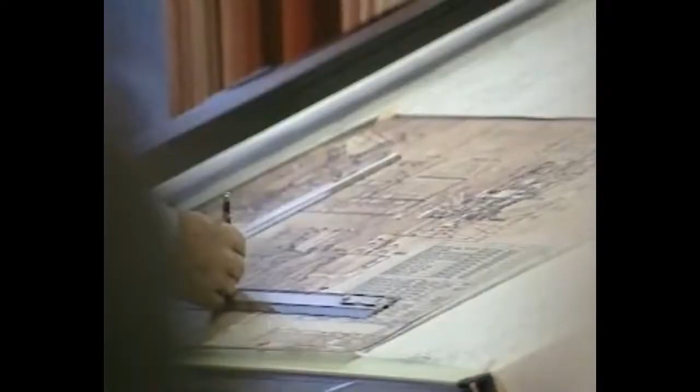BMV, Bergens Mekaniske Verksteder AS, is a holding company for the following group of companies: BMV Engineering AS, BMV Laksevåg AS, BMV Bergen Contracting AS, Bergen Jernstøperi AS, Norwinch AS, and BMV Machine AS.

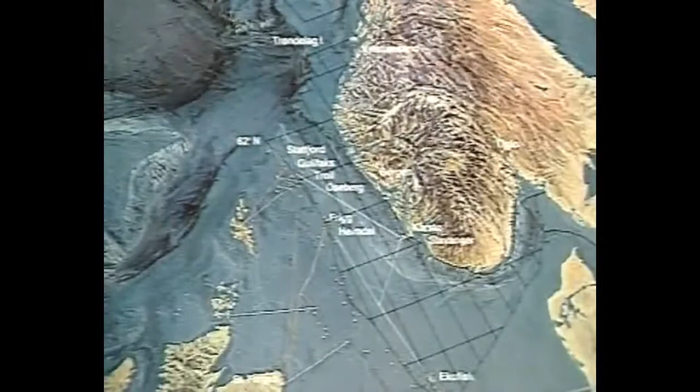BMV Machine AS is located near Norway's second largest city, Bergen. The plant itself is located at Hordvikneset, some 20 kilometers to the north of the city of Bergen.

The modern installation was established in the period between 1968 and 1972. The site itself covers approximately 50 acres, with approximately 10 acres presently being utilized.

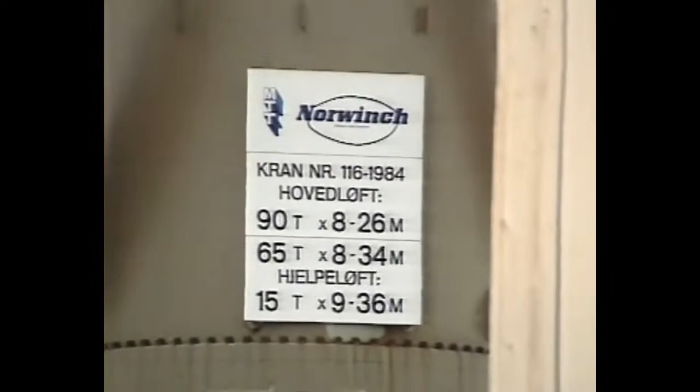The plant is ideally positioned on the coast, and the quay is arranged to accommodate vessels up to 7,000 tons dead weight. The crane on the quay has a lifting capacity of 90 tons safety workload.

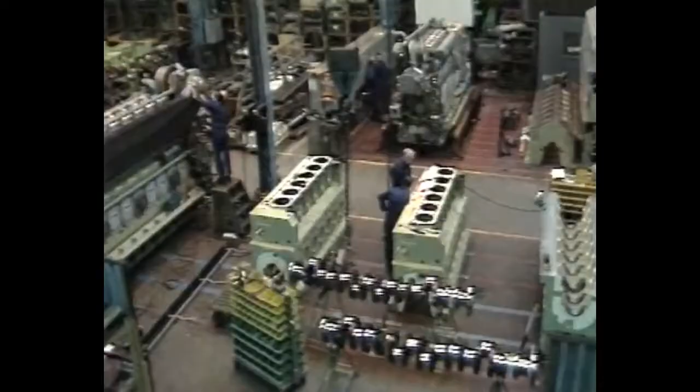The company is well known in the marine and offshore industry for its design and production of diesel engines and hydraulically powered deck machinery. The company employs approximately 800 people.

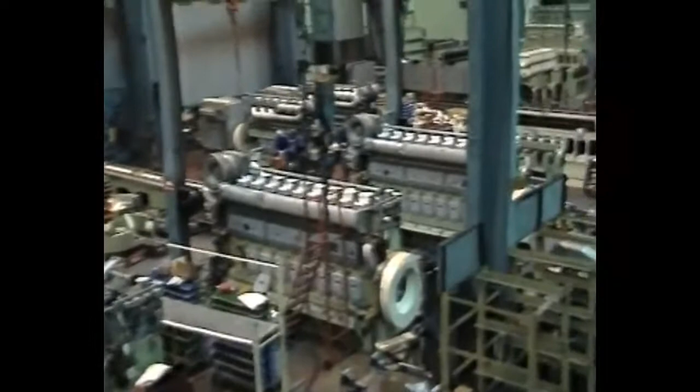350 of these are skilled workers engaged in numerically controlled machining, mechanical assembly, quality control, testing, service, and welding. The company also has 150 engineers engaged in design and research.

To ensure optimum coordination, BMV has implemented project management techniques as part of its managing systems.

The Quality Control Department has an authoritative function in the assurance that specified quality requirements are maintained at all levels in the organization. There is a steadily increasing use of computer-aided design in product design.

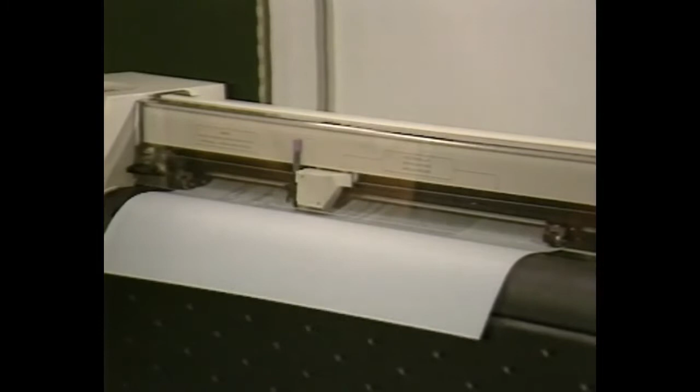This provides flexibility and ensures satisfactory utilization of capacity in the design departments. Alternative designs can be quickly compared, and changes in design are much easier to accommodate than with previous traditional practice.

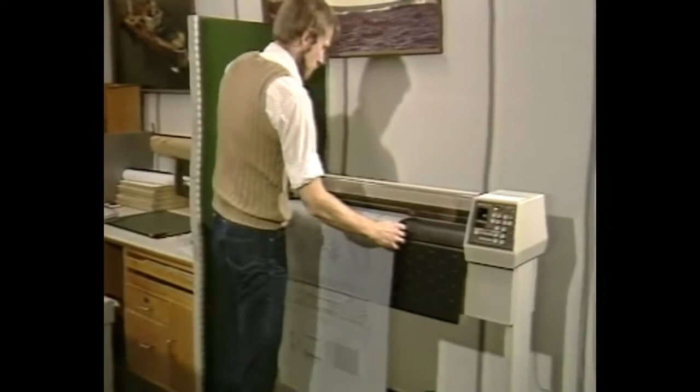The utilization of the finite element method assists in the calculation of theoretical stresses and deformation in proposed designs. This provides the opportunity to obtain optimum design solutions.

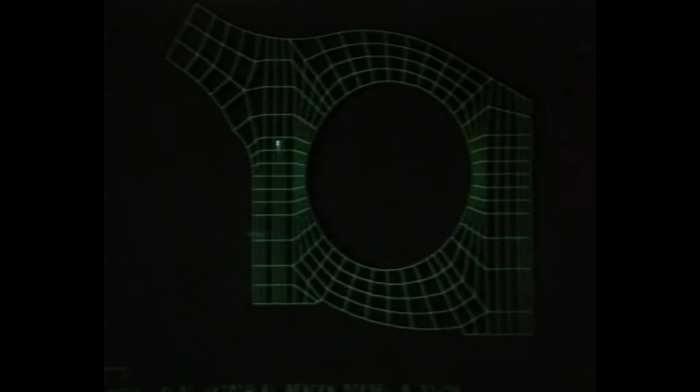An important aspect is the very high speed of these calculations, enabling alternatives to be evaluated in a very short time. The solutions arrived at with the help of finite element analyses in the initial theoretical evaluation can eventually be compared with actual measurements taken at the completion and test of the equipment involved.

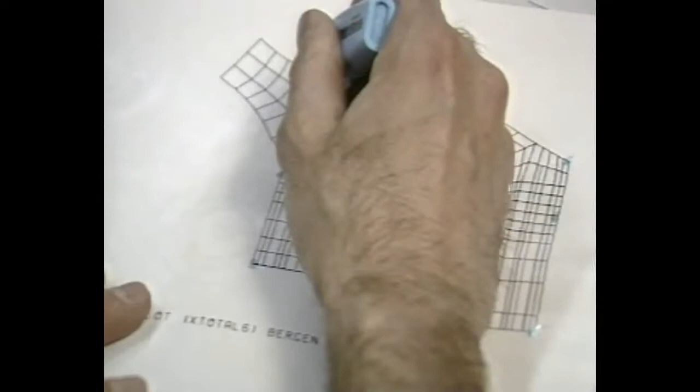This provides engineers with the opportunity of actual experience with utilization of computer-based models for obtaining optimum design and performance of the equipment.

Computer-based models are also utilized for the calculation of frequency response, torsional vibration calculations, linear and nonlinear dynamic systems, and stability analyses of speed governing.

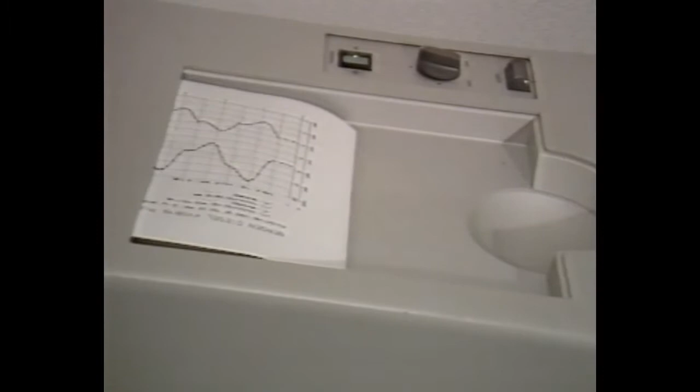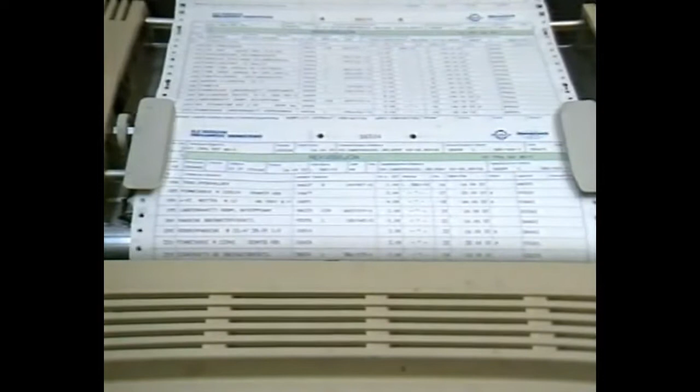Computer-based systems within material and production control ensure optimal stock control and capacity utilization. The MPS system provides quick and reliable information regarding available technical resources.

BMV Machine uses numerically controlled machinery for approximately 60% of its machining. CAD-generated drawings give the basis for the development of programs employed in the control of numerically controlled machines.

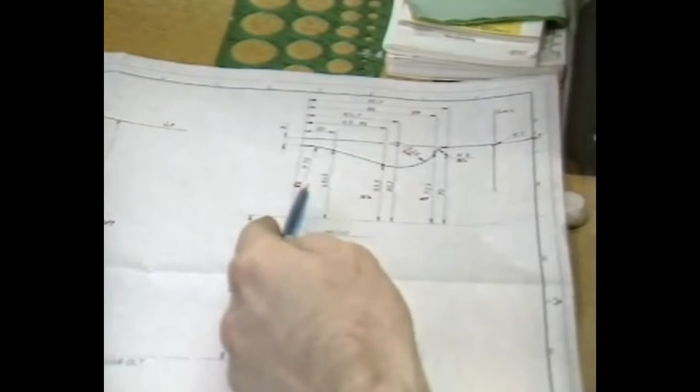APT, Automatic Programming Tool, is utilized. This is an advanced computer language especially developed for a rational description of operations and tool paths in numerically controlled tooling machines. Through the application of a post-processor, the APT program is translated to the individual control languages.

Computer-aided manufacturing gives optimum machining data and a graphic verification of the tool paths. The movements of the tools are simulated by the computer.

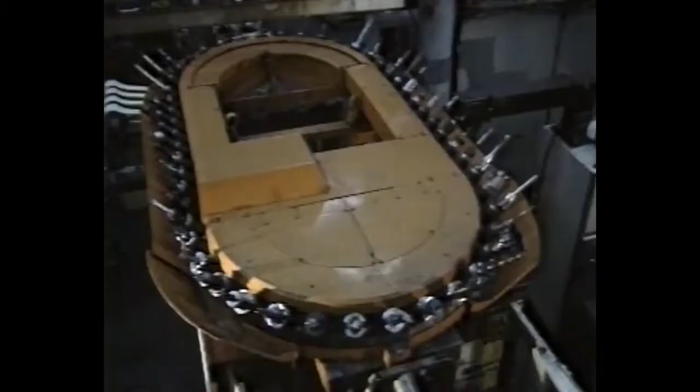The completed programs are entered into the individual machine's control units. This ensures completion of the defined tool path with very high precision.

Complementary components are ensured a corresponding dimension without the use of jigs.

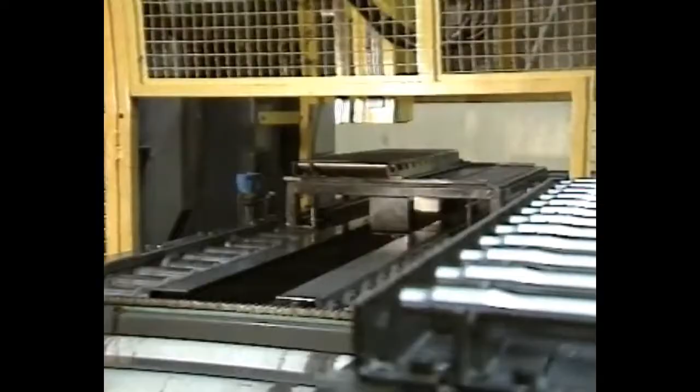This machine picks up the blank parts from the component station and delivers the parts forward to the machining area for location in machining position.

This machine is numerically controlled and designed to check the dimensions of the machined components. The machine registers any discrepancy from the defined tolerance and corrects for tool wear and other causes of possible tolerance discrepancy.

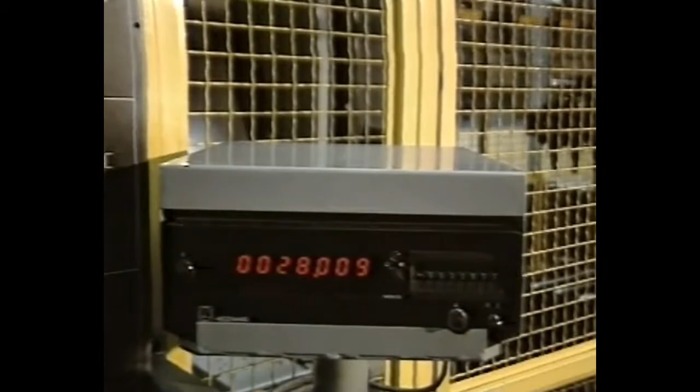NC machines require tool presetting. In this operation, precise checking is of importance.

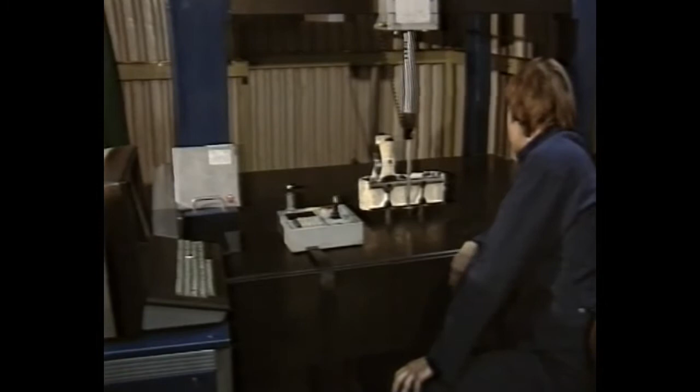At the computer numerical control measuring machine, the dimensions of the products are checked with high precision.

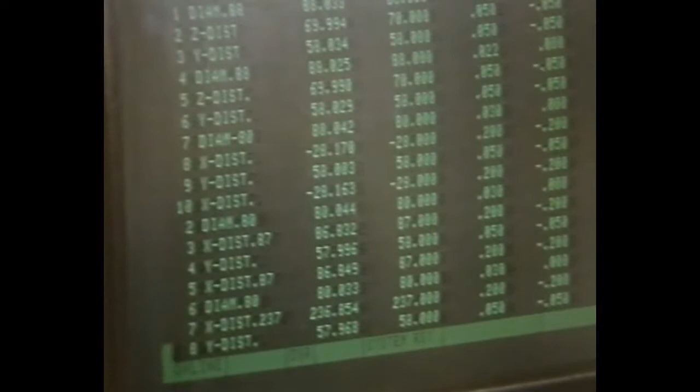Any measurement discrepancy is presented both on a screen and at the printer. This ensures that any dimensional discrepancies may be corrected.

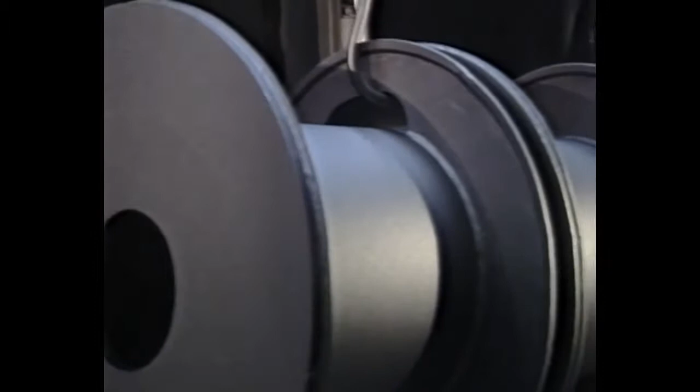A modern shot blasting installation can clean products of up to the following sizes: the largest diameter, 2,850 millimeters, and maximum height, 4,669 millimeters. Cleaning effect corresponds to SA 2.5.

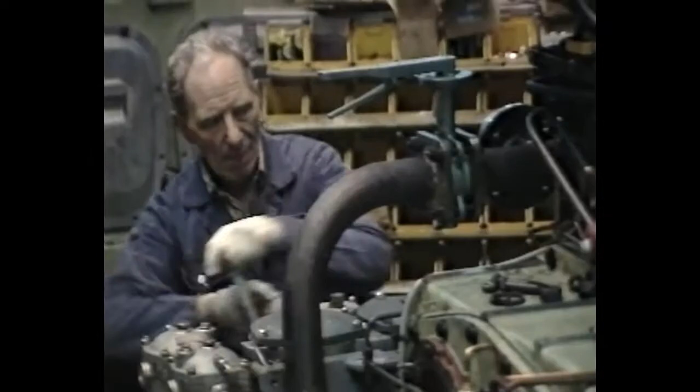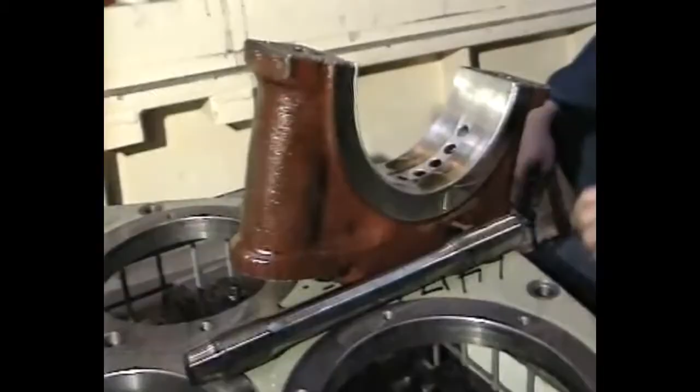The company has solid traditions in the assembly of precision products, such as diesel engines and hydraulic equipment. Personnel are used to working with fine tolerances and under strict requirements for cleanliness during assembly and testing of the equipment. Trained, skilled workers are able to meet the relevant quality assurance specifications and requirements.

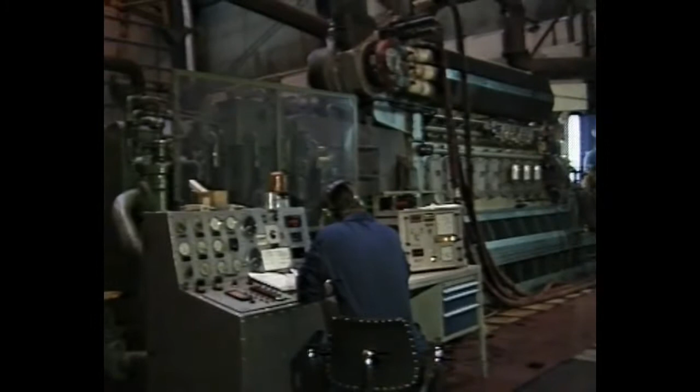All products are tested in simulated operational conditions in accordance with quality control requirements. Documentation from these tests is supplied with the product.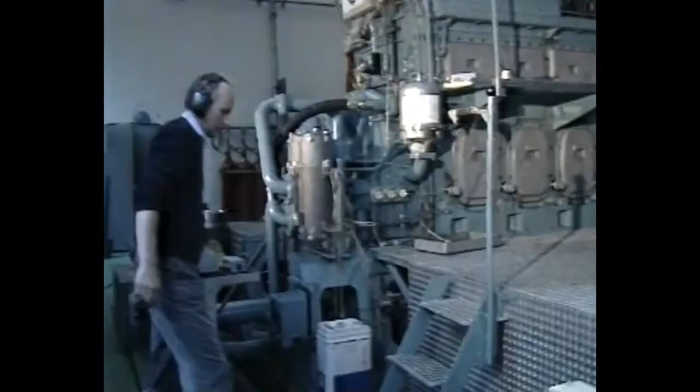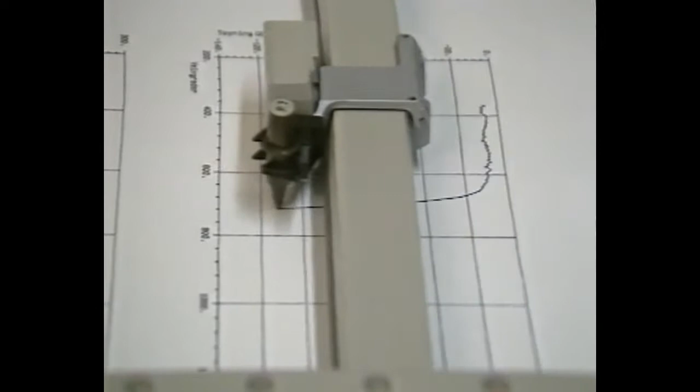The company utilizes computer-based measuring procedures in connection with product development in diesel engine design and hydraulic equipment design. Since 1976, special computers have been in use for acquisition, processing, analysis, and presentation of measured data.

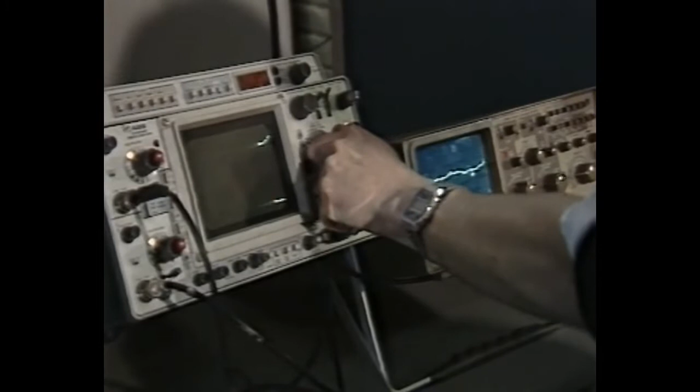This computerized equipment has been updated continually in line with developments in this field. The system can handle static and dynamic measurements and includes comprehensive information on most physical parameters.

An example is the wireless transmission of signals for moving parts within an engine, that is, crankshaft, pistons, etc., with an acquisition frequency of up to 50 kilohertz.

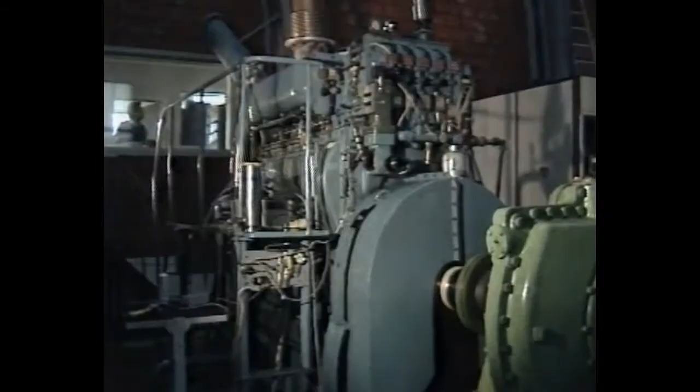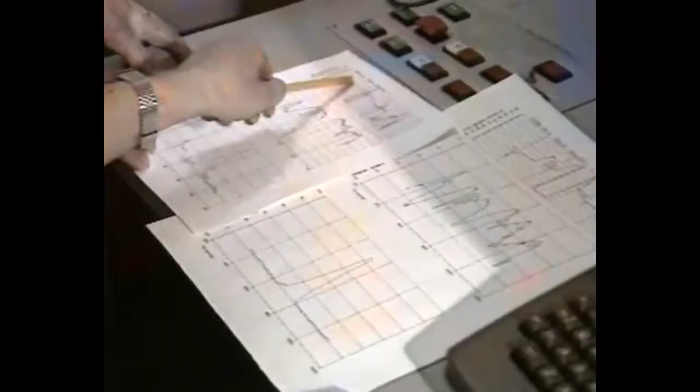Similar testing and measuring processes undertaken in the field outside the plant are normally recorded on a multi-channel tape recorder for later playback for further processing in the computer.